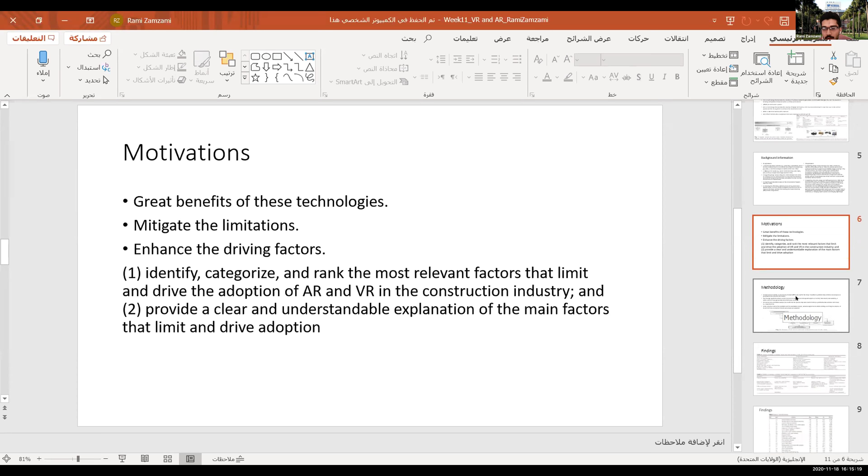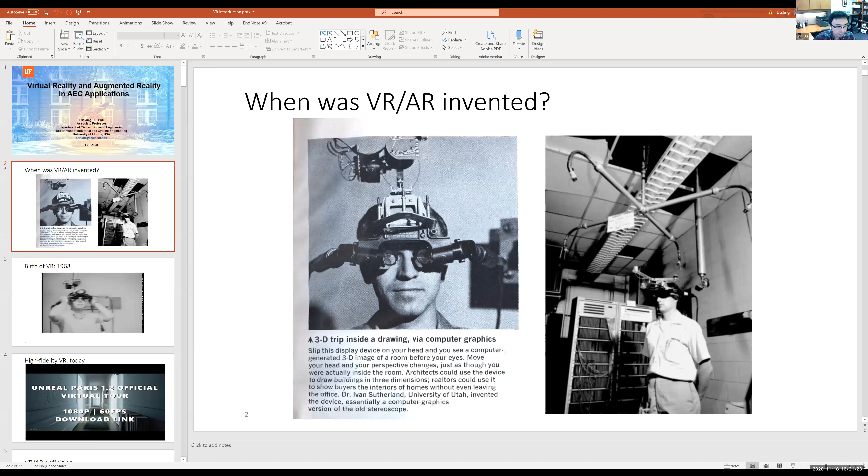Unlike a lot of people imagine, VR AR is actually a technology that has a long history. It is usually believed that it started in 1968, by Dr. Ivan Sutherland from University of Utah, who developed the first ever computer rendered augmented or virtual environment. At that time, the system actually took up the entire room.

As you can see, they had to remove some ceiling tiles to have this infrastructure built. And the device, the HMD, the head mounted display, was so heavy that the user had to use two hands to hold it while using it.

I think the reason we call this the first generation VR is because the system can understand the motion of our head and render different angles of the virtual objects, which is the fundamental definition of virtual or augmented reality. This is a video I found on YouTube showing the first head-mounted display of VR.

As you can see, you had to use your two hands to hold it, and there's a lens, a look-through lens. You can move your body, move your hands. There are some IMU sensors built in, and as you can see, this is a rendered cube.

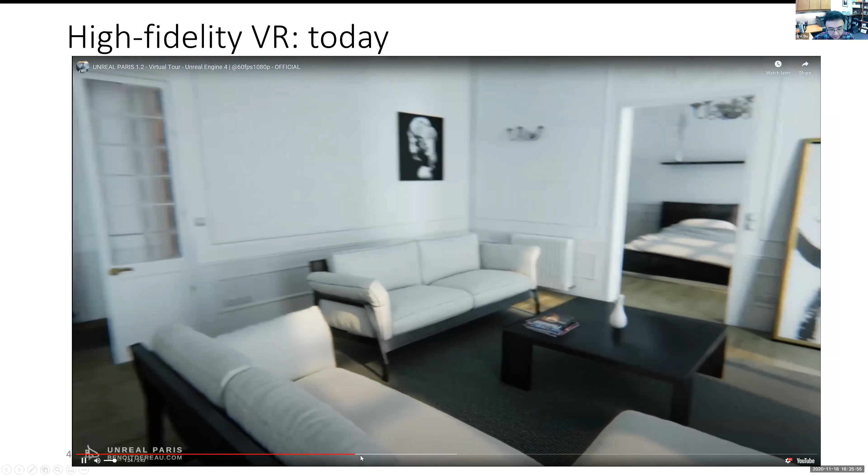You see, you can define the feeling, the texture, the reflectivity of different materials like wood, metal, clothes, and also later you can see the reflection of mirrors. That's what we call a game engine.

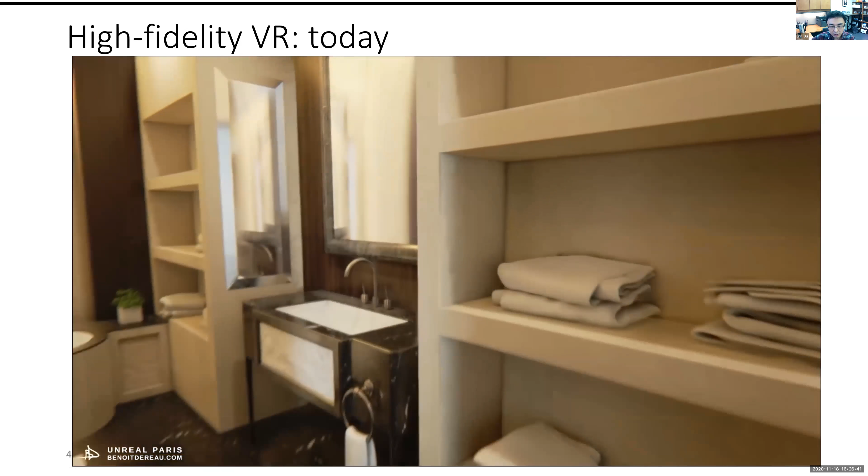Let me fast forward. And in the bathroom, you can definitely see the reflection of the mirror, and everything is so real until you don't see your own reflection in the mirror -- you know something's wrong.

There's a consulting company called Accenture, and Accenture actually published a report about 5 years ago, and their experts did some crazy mathematical analysis and say there's a 50% chance that we are actually living in a simulated world. You never know, right?

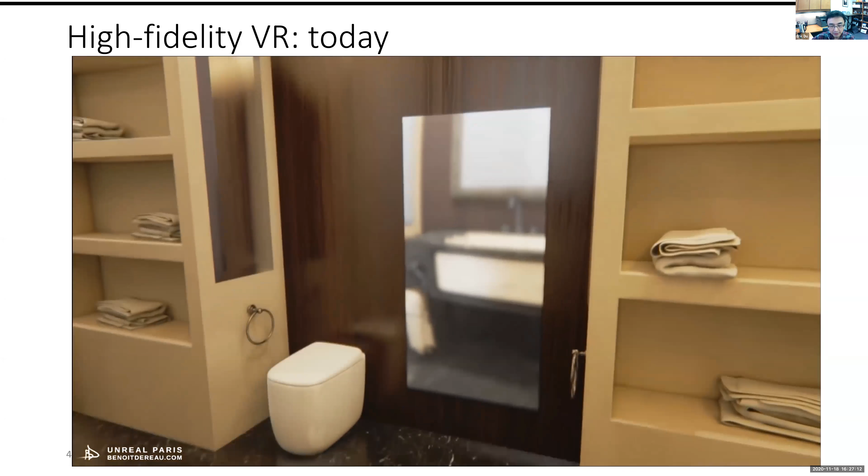I have to say, I started VR research in about 2014, so it's been six years. But I was still shocked when I first saw this video, this piece of work.

I actually sent an email to the author of this model. I asked him -- this is a guy from France -- how long did it take you to build this model? I was expecting answers like 2 months, but he just told me like 4 days.

I don't know his current status, but at that time he was an architect working for some company, and he said he had about 10 years of experience building rendered models. You guys took my BIM class, you know what rendering means, right?

So you have a model. Rendering means to make the model photorealistic, right? To generate the feeling, the texture, the reflection, everything.

He said: I decided I just entered into this Unreal game engine. I love it, and it took me just 2-3 months to know the functions of it. But everything else, I learned from my previous work, like how to render a model. So it's not just about how to use the program, but it's more about the feeling -- like knowing how to assign the right color, the right texture, and adjust the right parameters to show the proper reflection.

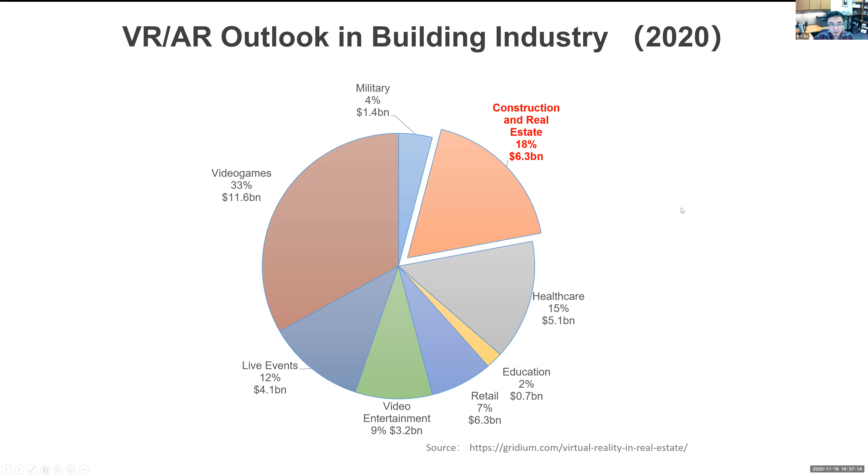So why should the AEC industry care about this new visualization method? First, we have to keep in mind that AEC is a highly fragmented industry. We have so many parties - I think I talked about this, it's something called the lack of vertical integration.

The biggest difference between us and the manufacturing industry is if you think about Ford or GM - those bigger automakers - from material supply to logistics to assembly to marketing, they are actually under the same name, under the same umbrella of one group company. So they've already integrated different phases of production into one process. But unfortunately, since each construction project is different, each building is different, it's very difficult for us to have such vertical integration.

So we're talking about different parties in a project - designers, engineers, general contractors, subcontractors, owners - and we are exchanging a lot of information while representing very different business interests and focus. So in general, this is very fragmented and lacks organization.

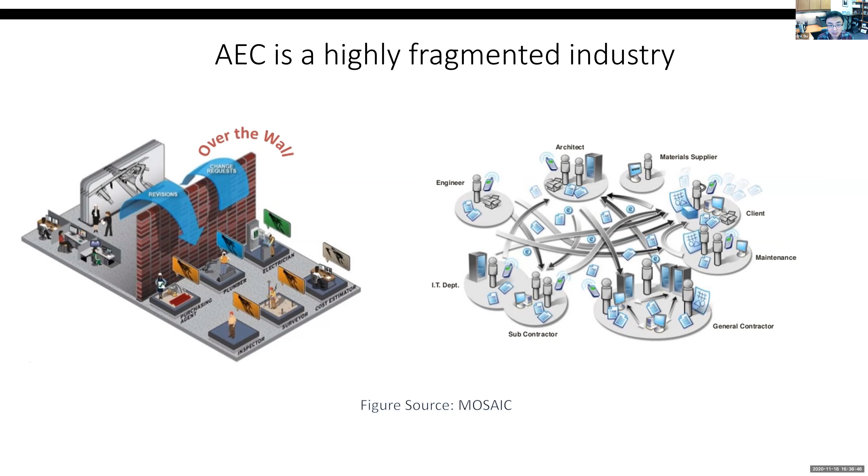According to this Building Smart report from 2013, about 50% of project cost can be estimated as waste. So if you're talking about a $1 million project, according to their survey data, about $500,000 can be avoided - that can be considered waste due to lack of communication. About 30% could be saved with improved communication. So let me correct myself: 50% is the waste, but 30% can be saved. The other 20% waste is probably something that can hardly be avoided.

We know construction will generate waste - if you have a drywall project, if you're pouring concrete, there's always physical waste, right? But 30% of the waste should be, and can be, saved with improved communication.

About 56% of project cost is put at risk by ineffective communications. What I mean is, yes, I have a $1 million project and I know 50% can be considered waste, but on top of that, there's a big chance of overrunning the cost. Did I show you guys the graph - the survey data showing the percentage of project cost overrun? If not, I think I showed you when I was talking about Monte Carlo simulation last time.

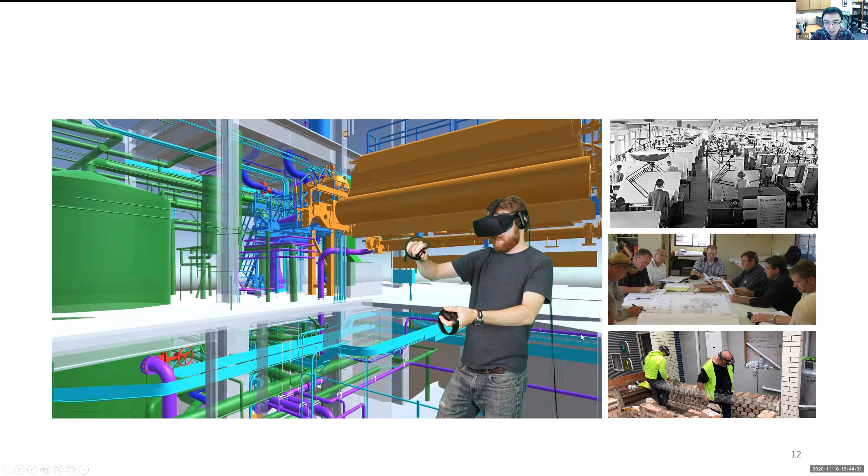The change of an industry is more than the physical methods—it's also the information revolution in our industry. The major milestones are the invention of 2D CAD in the 1970s, 3D CAD in the 1990s, building information modeling around the new century, and VR about 4 or 5 years ago. Every significant milestone means we are adding a bigger amount of information into the game.

With 2D drawings, you can only see the geometry and shapes, and all the other information has to be delivered as a specification, which we call specs. For 3D, like building information modeling, yes it's 3D geometry, but you can also add what we call semantic information inside the model—information about the material, the PSI, installation rate, supplier name, everything relevant to that particular object, like that door or that steel column. That is called semantic information, and it can be inserted into your presentation, into your model.

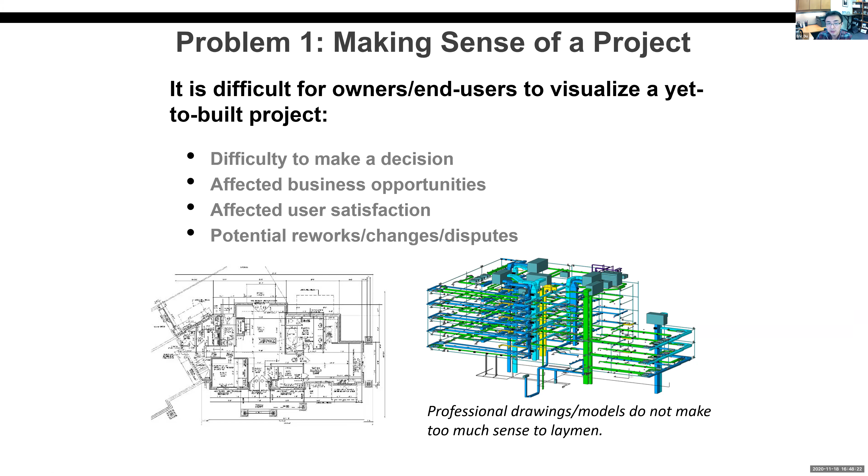The problem with this difficulty in making sense of the project includes difficulty making good decisions for the owner, affecting business opportunities, user satisfaction, and it also generates a lot of rework, changes, and disputes.

And we also know nowadays projects often happen remotely. You have designers, engineers from the California area, you're building something in New York City, but the owner is from China, for example. That's very common. It's very difficult to bring people together, and teleconferencing, like a Zoom meeting, wouldn't help too much. So how to use virtual reality, augmented reality to enable more effective, immersive teleoperation, teleconference, remote communication—that's also a very important topic today.

And also how to coordinate design virtually. I can see you guys, I can meet you guys, we can share ideas of the design, but we really want to touch something. If it can be something floating in front of us that we can manipulate as the same model, generate ideas—it's kind of like children playing a Lego game together. That would be more effective.

So that's why my team started this virtual reality research. We try to solve the problems mentioned: how to make sure remote people can work together on the same design, how to make sense of a design much better to enhance the design. And this is an old video, I think from 5 years ago, but it's still a very interesting video.

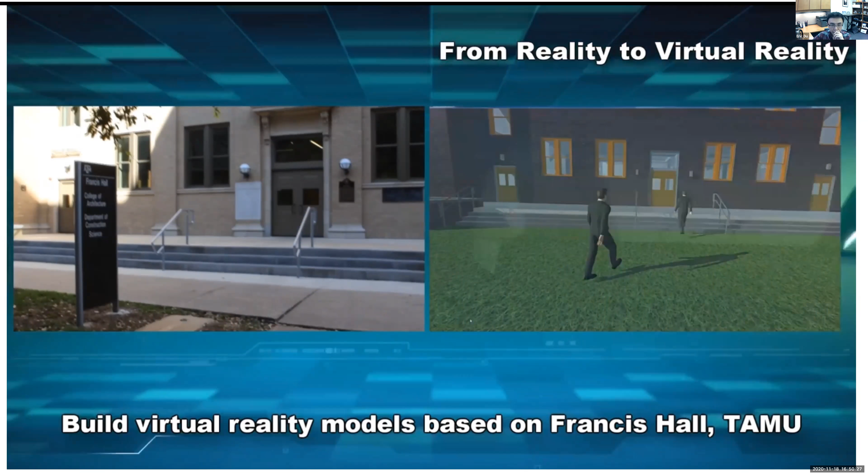So as you can see here, we basically converted the building information model into VR. We were probably one of the first few teams doing that. We work on BIM and we try to figure out a way to convert the BIM model directly to VR.

We built this ugly laser gun, and this is a multi-user VR. So actually people from different places can log into the VR model, and we try to figure out some way to point at things. So we built this ugly laser gun to point at things at that time.

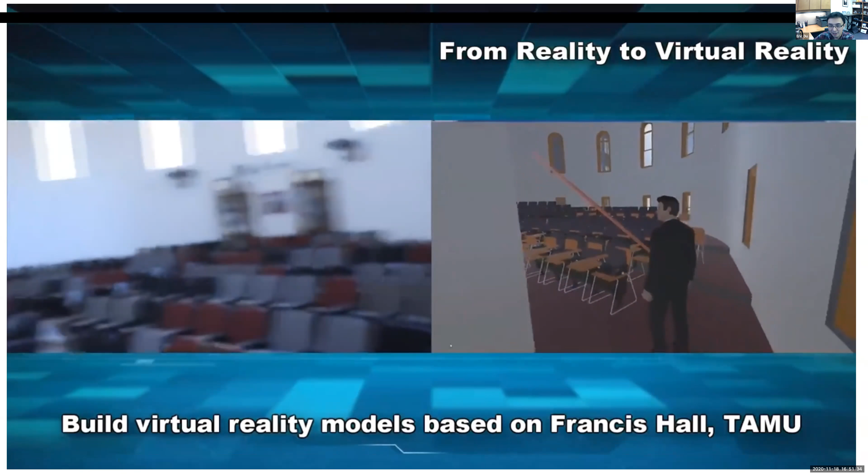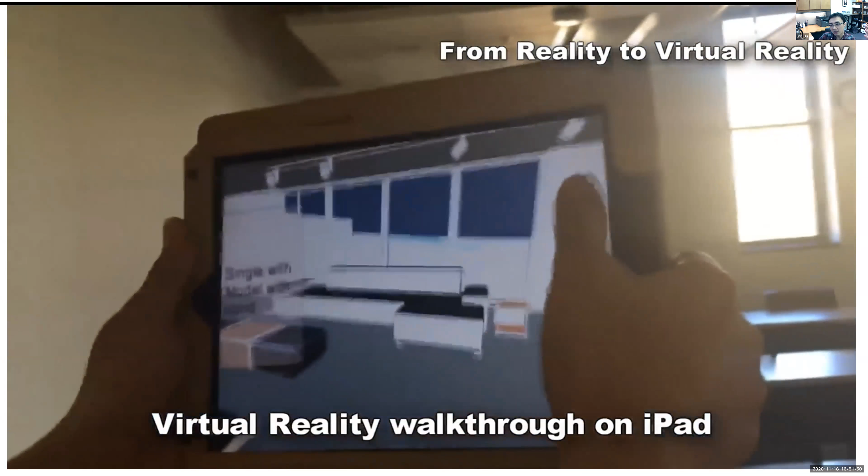And of course, we had an iPad version. You can pick your avatar and walk in this virtual building while you are in the real building. Of course, we also had a phone version.

So we were sharing the idea of the VR with a lot of industry partners at the time. But you are talking to a bunch of gray-haired people, they are in their 50s, 60s. They don't know how to touch the phone, they were so embarrassed to touch the keyboard.

So we really wanted to figure out an intuitive way to control the movement in VR, which we call HCI, human computer interaction. So we developed this interesting sensor.

We bought this one—you guys know the game, right? So this is actually a dancing game pad. You can dance on it, but we revised it. So then you just stand on top of it, and by leaning forward, leaning backward, or jumping, you can control the movement of the avatar.

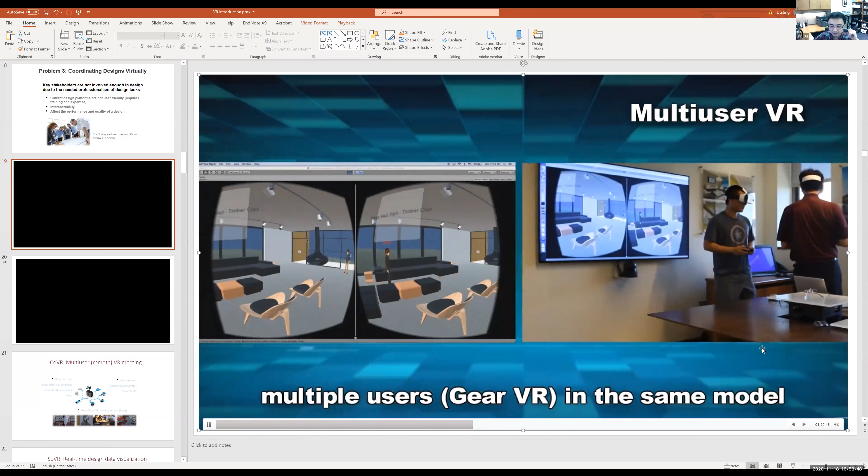So I can see here, we were connected remotely and wirelessly in the same model. Three of us were connected remotely.

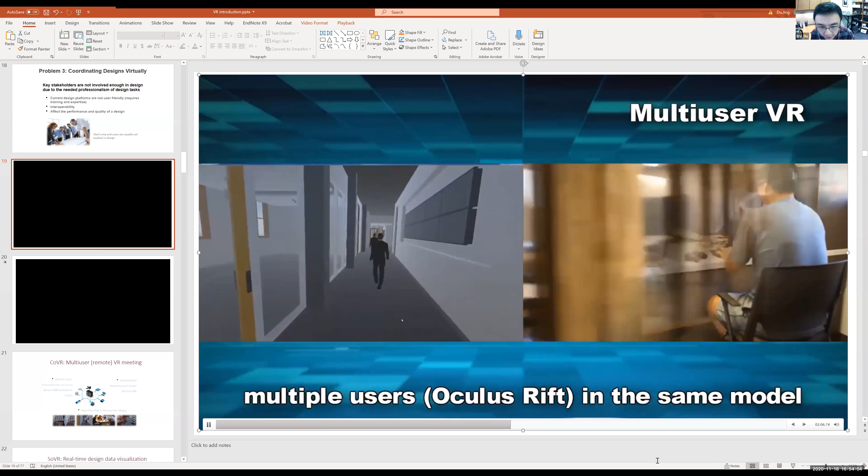Can you hear me? Now follow me.

And also at that time, Zoom was not popular, and we built our own voice over IP communication method in the VR model. So it's kind of like the video chat in any video game.

This pointer? Yes, I can. Yes, I can.

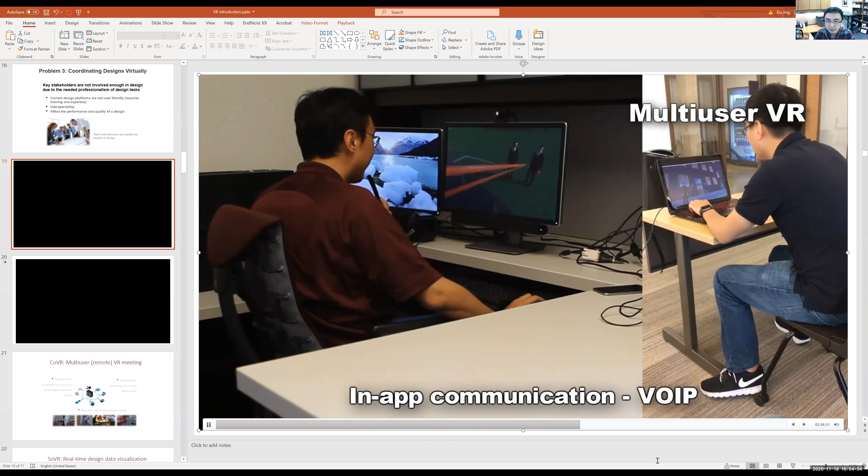And this is the paper you mentioned, Remy. We developed a real-time synchronization system so that if one person changes anything in the Revit model, the other person can see the changes immediately in VR.

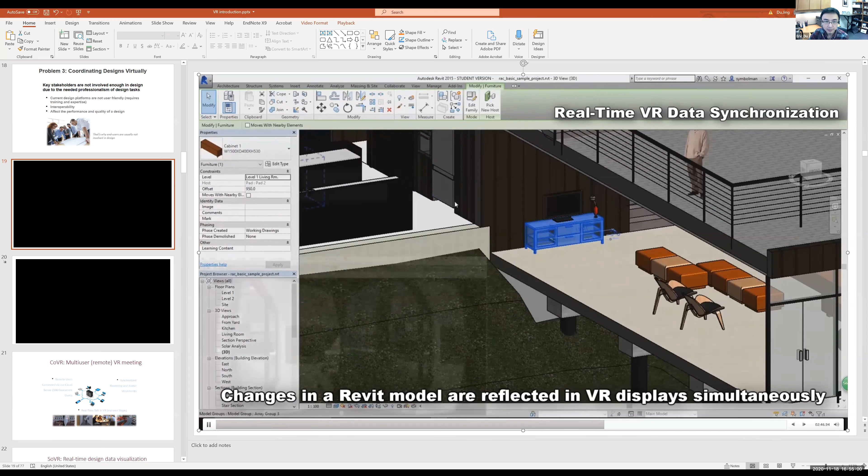This is Revit, this is VR. Let's say I change the size of the TV stand—the data will be sent to VR and change immediately.

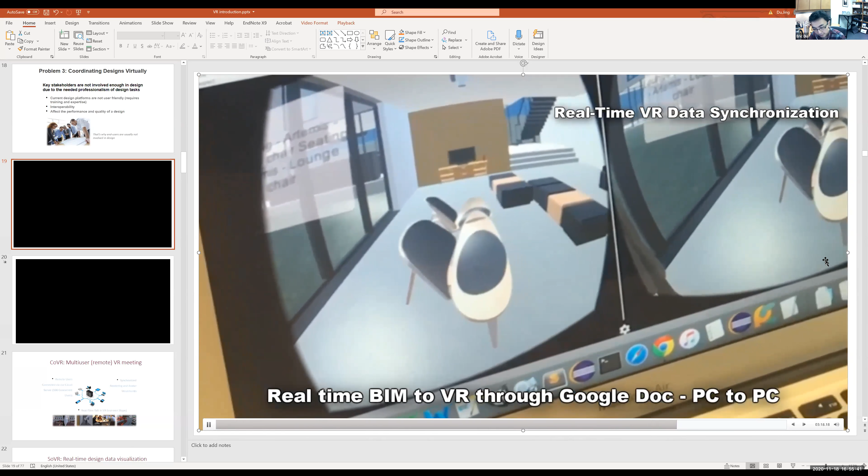And here we're just having fun - we linked the Google Doc to the VR model. So if you change the number in the Google Doc, you can change the VR view. Of course, you can use your phone to change the Google Doc and change the VR.

So for this work, the reason we are using Google Doc is very simple. We were very poor, we don't have any money to support the research, and we were trying to find a cloud server. The idea is very simple.

You have a BIM model here, you have a VR server here, you need a cloud server. The server will read data every second from the BIM model and send the changes to VR, right? So that's how it looks.

But we didn't have time to rent any server. Then we found a free, very stable server - I guess I said we, but it's actually I found that one. It's Google Doc. The idea is any computer programming is some kind of computer language, and I think Google Doc is a word editing software - it should be able to also edit computer programs.

So what we're thinking is we basically create a Google Doc with an IP address, and then we build a Java function inside that Google Doc. And this Google Doc becomes some kind of database plus program. It basically reads this BIM model every second, like 10 times a second, and then sends the updated data to...

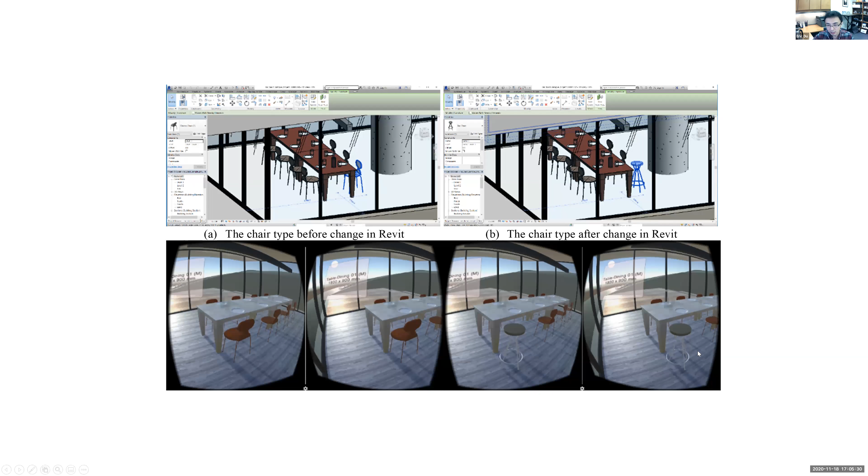Yeah, this is how it looks like. Like you change the type of the chair, then in the VR, the type of the chair also changed. And here is a case: you move the location of a concrete column in the design, and in real time, the column location is moved.

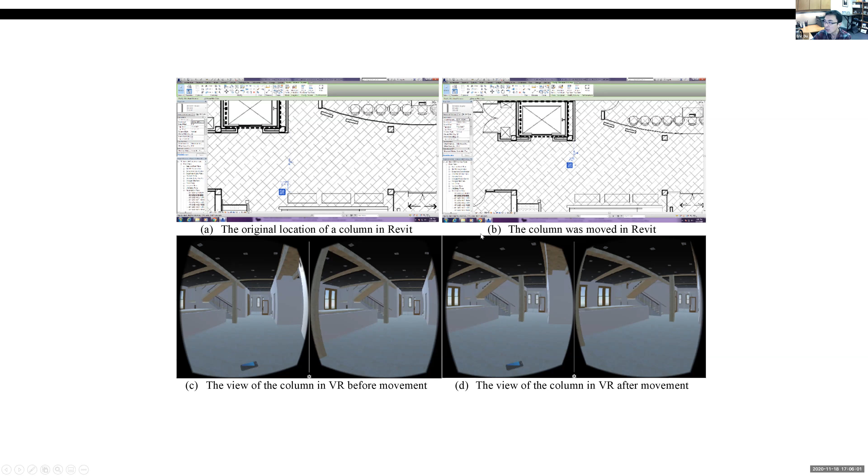Why is this important? If you're asking your owner, is that okay for me to move the column from here to here, it's probably very difficult for them to think about that. But unless they are sitting, standing in the building and see that and say, no, I don't want you to move the column, I think the column will block the traffic. This is why this real-time rendering and communication is so important.

Of course, it's not just us. VR has been widely used today to engage end users in co-design. For example, McCarthy in hospital design had a successful story in 2016. They invited doctors and nurses to engage in the design, because after the building is built, if they say they want to move the location of a bed a little bit, it would cost them $500,000 — not just for the bed, but all the systems and devices connected to it.

IKEA actually used VR in their kitchen design in 2016. Do you know why? Because they wanted to shrink the head of the designer to the size of a small child, and see how their kitchen design affects the experience of a small child. That makes sense — what looks like a good design might be a disaster for children.

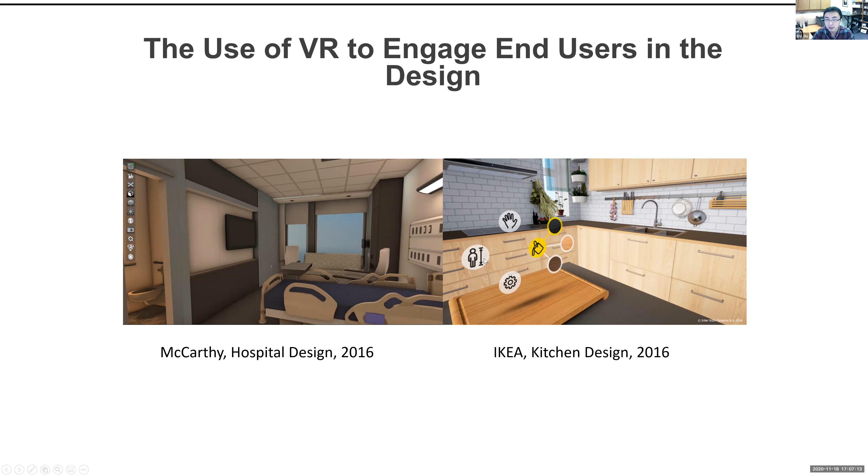NASA is also using VR for their design, but they're not talking about structural design — they're talking about shuttle design, panel design, like where to put the buttons. That's also part of the design. This is Lockheed, the number one contractor for DoD. They have this collaborative human immersive laboratory, or CHILL, where they invite mechanical, electrical, and structural engineers to log into the same model to design the engine and aircraft together. So this is a multi-user system.

So that's the use of VR for design. How about for construction?

We found a unique problem in construction: visual spatial ability. This is called isometric drawing, or ISO drawing. It's very popular for MEP. Basically for a pipeline, it's a 3D configuration, but we can only use 45-degree and 35-degree lines to show how the pipeline goes up and down, how it changes in space. This means you have to tell the orientation from this kind of 2D drawing, which relies on visual spatial ability.

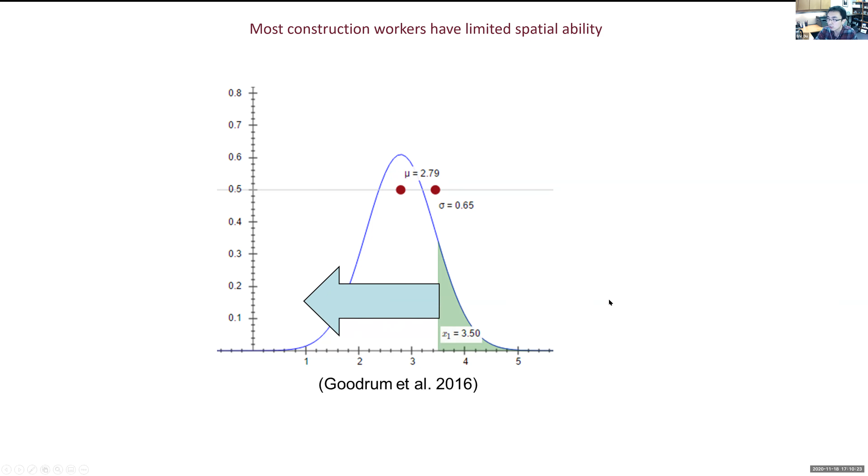But it's not easy, right? In fact, Goodrum, a professor from Colorado State University, is one of the first professors studying the use of VR for construction. He did a survey in 2016 and checked the cube test results of construction workers' visual spatial ability. 3.5 is considered an okay number, on a scale from 1 to 5. But you see, the majority of construction workers — more than 80% — scored lower than 3.5. So it's dangerous to just give them an isometric drawing and hope the magic happens, that they can figure out the 3D configuration by themselves.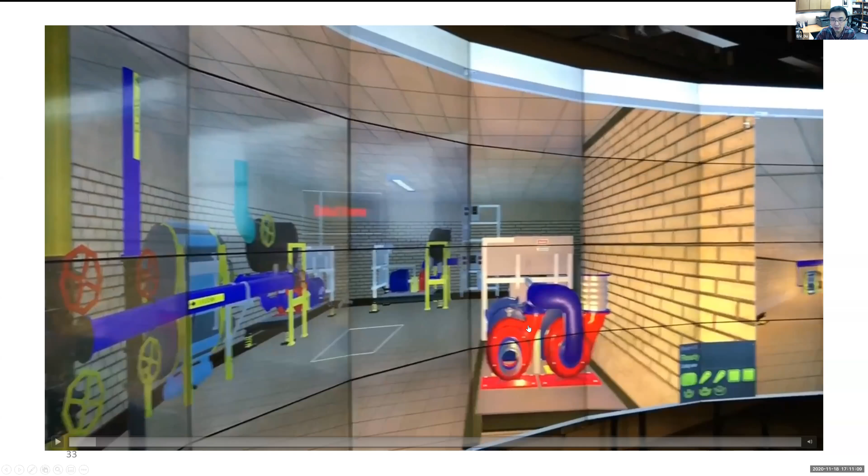This was my lab at Texas A&M, my old lab. We had this giant screen with 36 screens, with VR function. As you can see, this part of the screen shows a very immersive third-person view, this part shows the first-person view, and this screen shows the physiological information of the subject, such as heartbeat.

So this is the new BIM CAVE. Yeah, we were having fun — you guys didn't know that. When I was teaching building information modeling at A&M, I taught that course in this BIM CAVE. We had that big glass wall — if you turn it on, it becomes non-transparent; if turned off, it becomes transparent. I recall, for the game day, one of my students said, 'Professor, can you turn it on and let's check the game?'

And I say, "Okay, let's do it." So actually, we watched the football game here, and that was good. And also, when I was teaching VR, I just put the VR game here, and everybody was having fun playing the game. Very interesting experience.

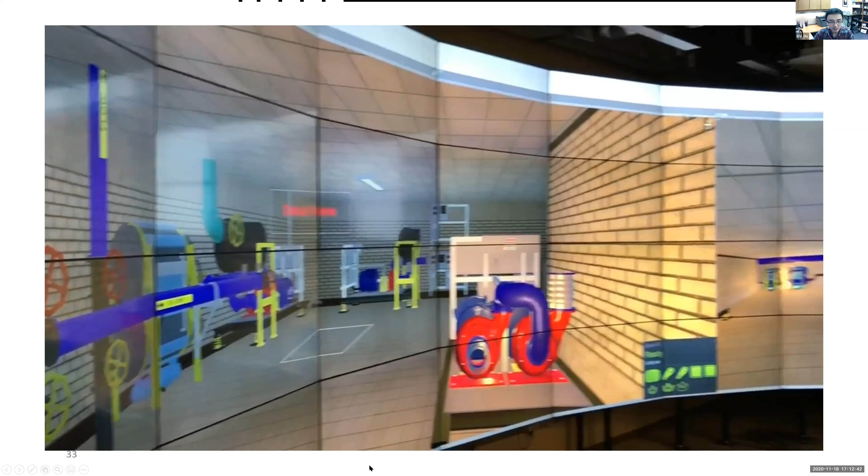This is body motion tracking where we try to use just a couple of cheap sensors called Vive trackers - 1, 2, 3: two on the feet, one on my belly, plus this headset and two controllers. With these 5 or 6 points, we use something called inverse kinematics to recover my body pose, because as a human being, if I know the motion of certain points on the body, I can only move in certain ways - it's based on human biomechanics. So we reproduce the body motion in VR because we believe this is important for accessibility review, like how I kneel down and do maintenance work - it depends on my body gesture. So we actually did that.

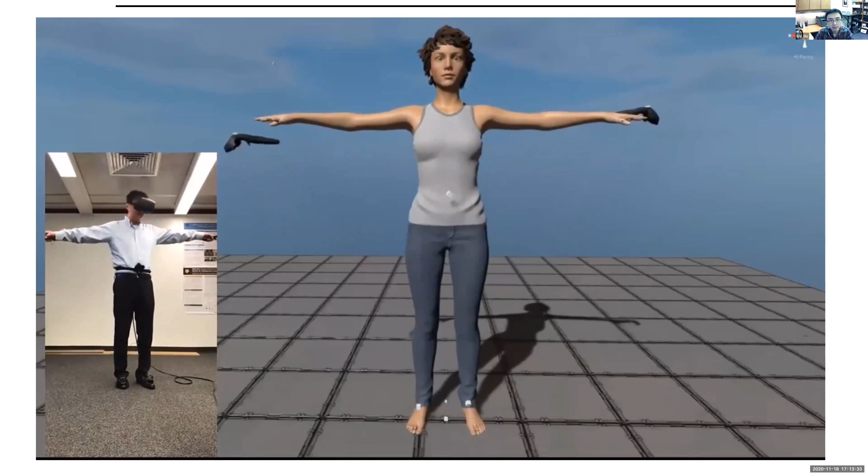Now I'm going into the body of this avatar.

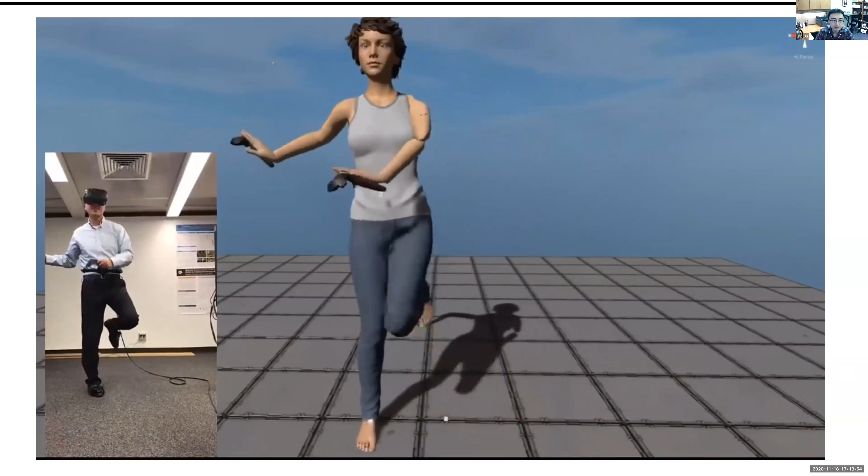And here, as you can see, VR can also be used for construction safety like this. We were doing this safety research - we want to see how VR can change your safety behavior. We designed this plank walk on a high-rise building, and we force you to go from one building to another. We did this experiment on, I think, 78 or 80 students.

And for this one, as you can see, we also track the body motion, but this time we use something called the depth camera to track the skeleton of your body and reproduce the motion.

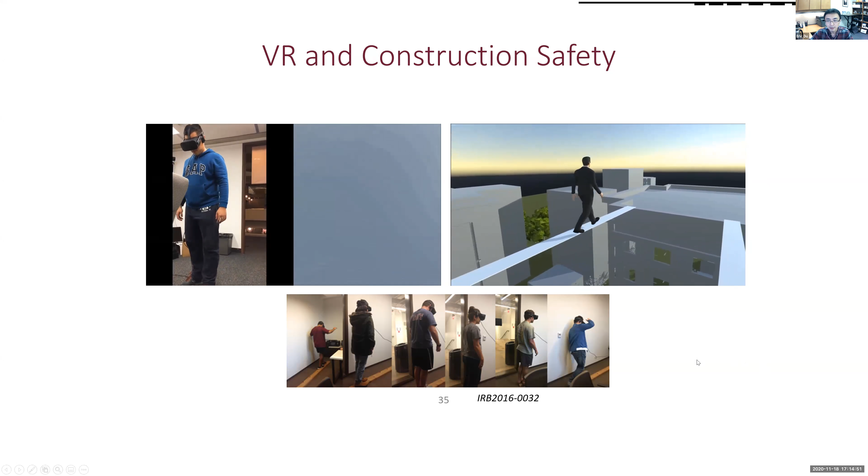If there's no pandemic, we would definitely ask you guys to try it. It's so interesting, especially when you fall down - that's a cool experience.

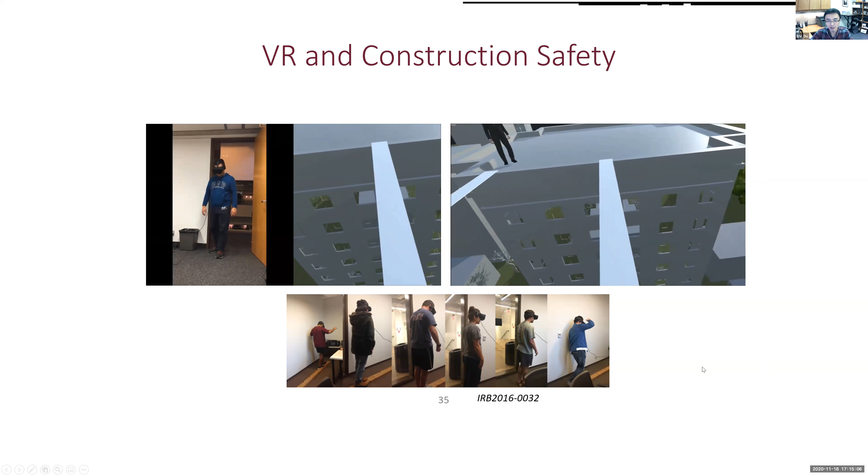All right, and also VR for QA/QC - quality assurance, quality control. We want to understand whether VR will improve your memory, to put it simply. If you're a designer, you design something, but usually the actual building can deviate from your original design. How can you be aware of that, how do you build your memory about this building, how effectively and efficiently can we do it? This was my previous department.

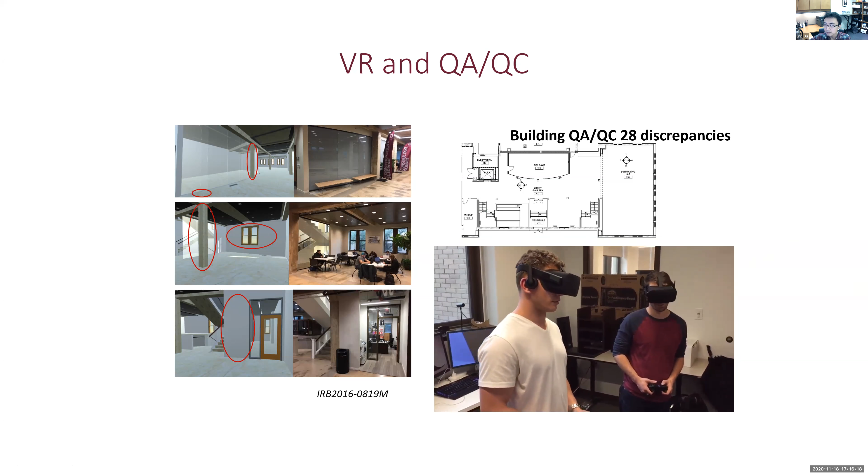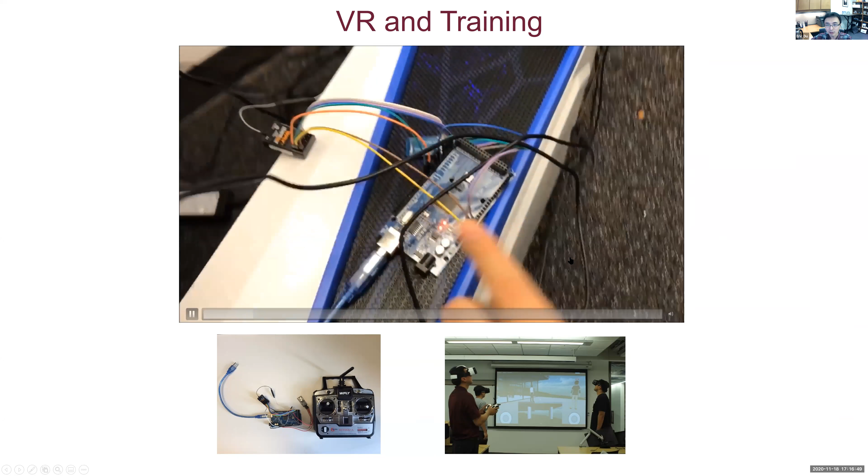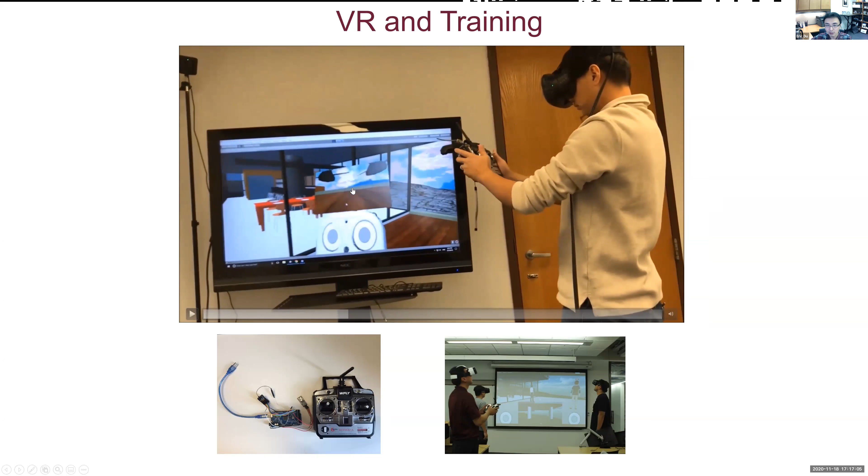And also VR for training - flying the drone is very popular today, but drones are also very dangerous and expensive. So we created this interesting VR system. We use a real drone controller to control the flight of a virtual drone, and meanwhile this real drone controller can also control a real drone. So imagine you are flying a virtual drone and a real drone together. The drone uses Arduino - we started development with Arduino - which can pick up and calibrate the drone. Now you fly the drone and we simulate the physics of the virtual drone, and also the camera feed from the virtual drone to the virtual iPad is simulated. So the experience looks exactly like flying a real drone.

We simulate the physics of the drone - see the drone actually turning and tilting, following exactly the physics of a real drone.

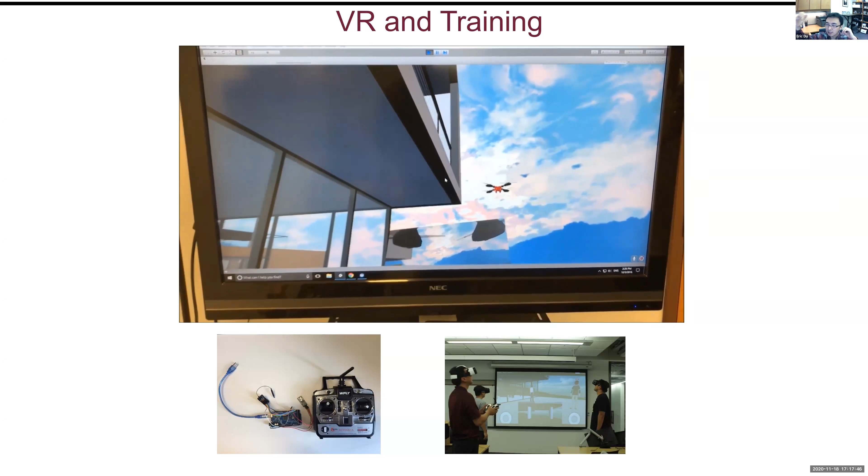Now we have a much better model, also showing wind, rain, snow, and the sound of the drone - like if the drone is closer to you, you hear a bigger sound. Now we have that kind of function built in.

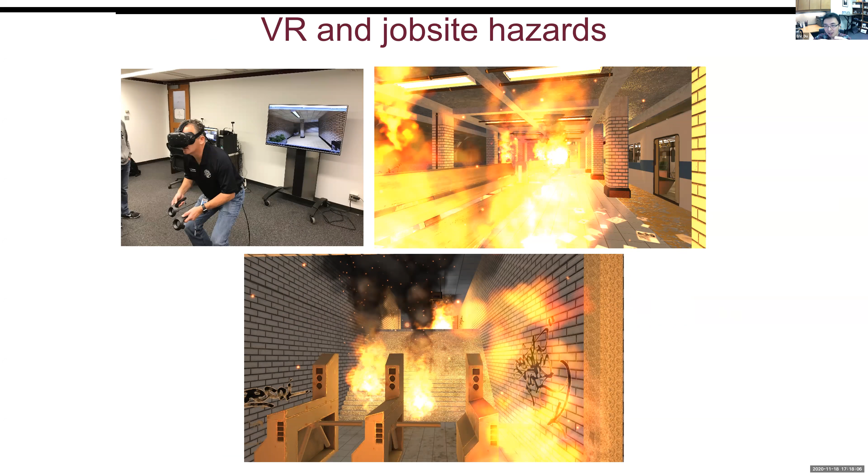We also work with first responders. We simulate different hazards like smoke, fire, and explosion, and see how VR can help them navigate in the space, and how we can better design the space to help in emergency situations - like when people have to evacuate, what kind of design can help them better find the exits. We've done a lot of work in that area.